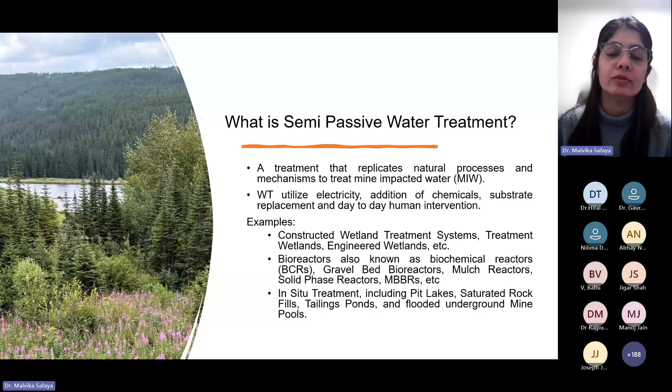Now bioreactors are kind of a replica of wetlands, so they are also known as constructed wetlands many times.

While selecting a semi-passive water treatment, there are some performance liabilities involved, some risks that need to be considered. The very first one is the maximum contaminant absorption capacity of the plants, because whatever inflow comes in daily will have different contaminant loadings every day. Then the second is the robustness of the water treatment technology under bad weather or extreme conditions.

Usually the biochemical reactors are all exposed wetland systems, so they are always exposed to the environment. Hence they can see extreme climatic conditions, extreme summers, extreme winters, also extreme rainfalls. So the robustness or sturdiness of the water treatment plant is very important.

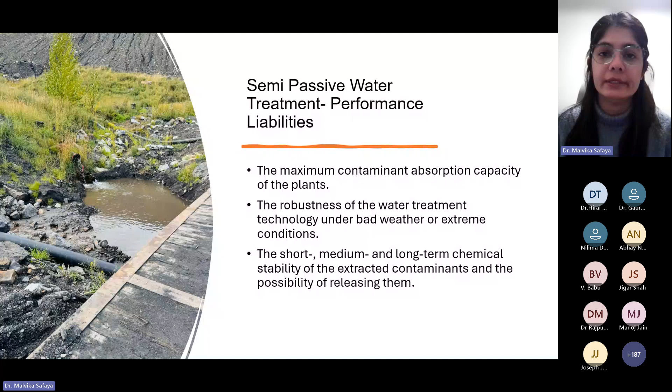The short, medium, and long-term chemical stability of the extracted contaminants and the possibility of releasing them is again a very important thing. The contaminants that we are trying to remove should become stable - if we are releasing them into the environment, they should become chemically stable.

BCRs can be constructed at remote mining sites with simpler equipment and materials than many other treatment options. They also require very little maintenance. They are gravity-driven systems and require very little energy. Unless a pump is being used, and then those pumps can also be powered by solar or wind energy. The materials for the BCR can often be obtained locally, which promotes reuse and decreases transportation needs.

Now all of this is well said and true, but in many cases and situations, sometimes it's really not as simple as it just looks like, and the pointers that we have started with.

Mine sites are mostly remotely located, so these are the factors that make the biochemical reactor a very suitable option for water treatment.

The Canadian coal mining industry is basically distributed into thermal and metallurgical. The one I work in is the metallurgical one, and we produce steel making coal.

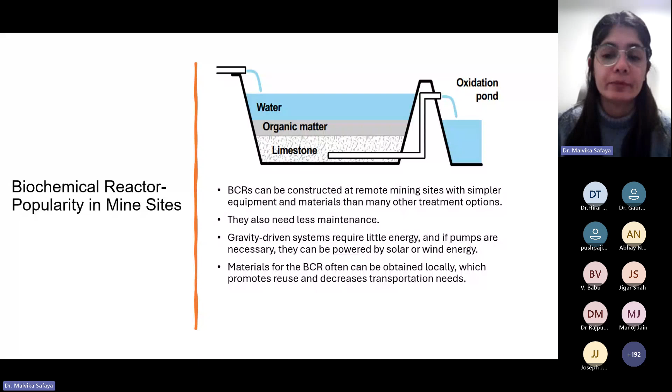The one I'm working at is the Brule mine. Conuma currently has around 4 mines: Wolverine, Willow, Brule, and Quintette, which was newly acquired. A very recently acquired one is the Peace River mine.

Out of all these mines, currently Brule is having the main biochemical reactors as a functional one for, I think, the past period since around 2015. Whatever gets started, like pilot scale or large scale, it gets started at Brule and then it gets applied at all the other mine sites.

Conuma Coal Resources Limited has one open pit coal mine site called the Brule mine, located in northeastern British Columbia. To meet the water parameters and comply with the Environmental Management Act permit 17679, a semi-passive water treatment, that is a biochemical reactor, was constructed in 2015 with an upgrade in 2017.

The treated effluent that we finally get released should meet the permit compliance and requirements, and then it gets discharged into Blind Creek, a small river tributary which joins the main Sukunka River, the main river body out there.

The 4 parameters of major concern for us when discharging this effluent are selenium, total suspended solids (TSS), nitrates, and total phosphorus.

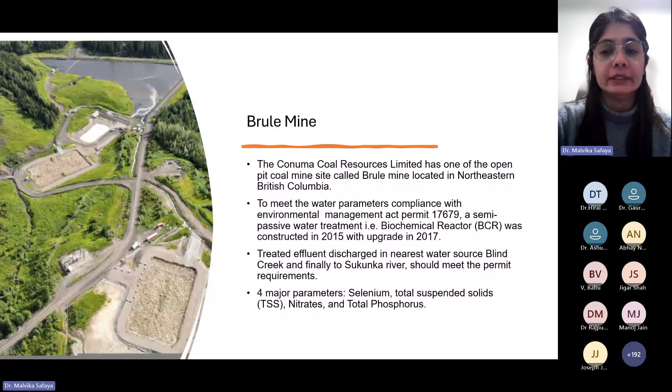The connection is such that the main sediment pond is the source of water to both BCR1 and BCR2. Once the water gets treated in BCR1 and BCR2, it goes to the aeration ponds, and from there this line goes to the MSP, the main sediment pond, and from there the water finally gets discharged into Blind Creek and then into the Sukunka River.

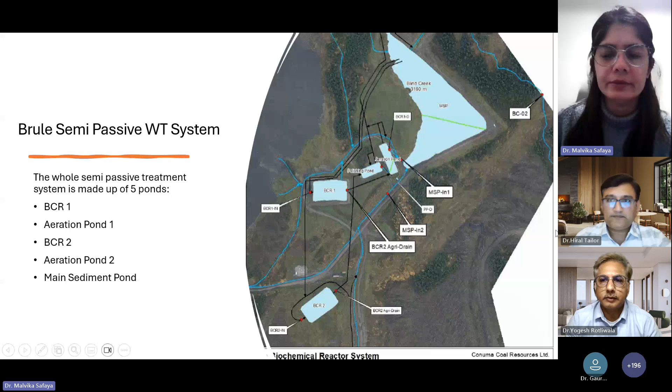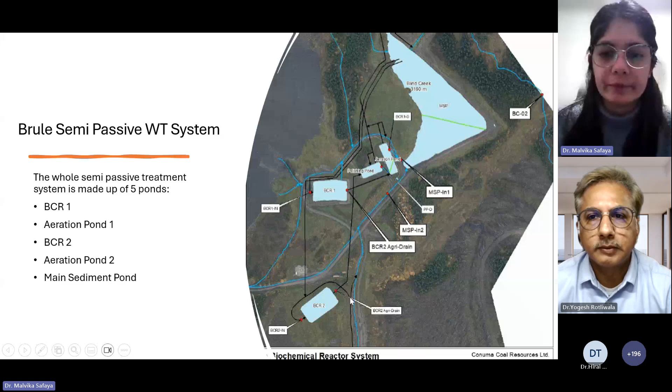Continuing forward, we have these two ponds and they are interconnected to the aeration pond, which finally goes to the main sediment pond. I believe these lines are not so synchronized because this whole system has undergone changes many times, so some of the images I have are very old and not properly updated. But the idea is I'll be explaining in the upcoming slides how this whole system is functioning.

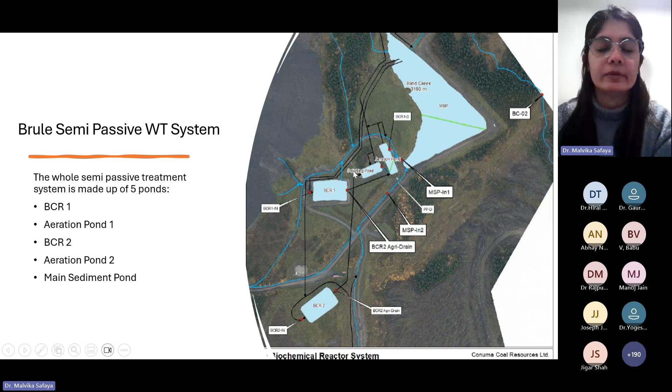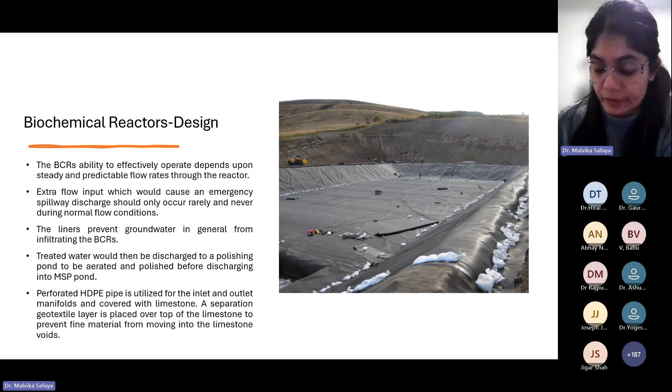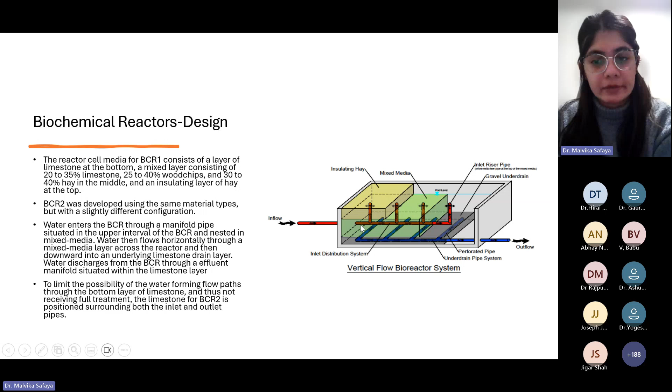A separation geotextile layer is placed on top of the limestone layer to prevent fine material from moving into the limestone voids. So in the previous slide, this particular limestone gravel layer also has a geotextile material on top of it, so that all the particulate solid material doesn't get trapped into this limestone layer.

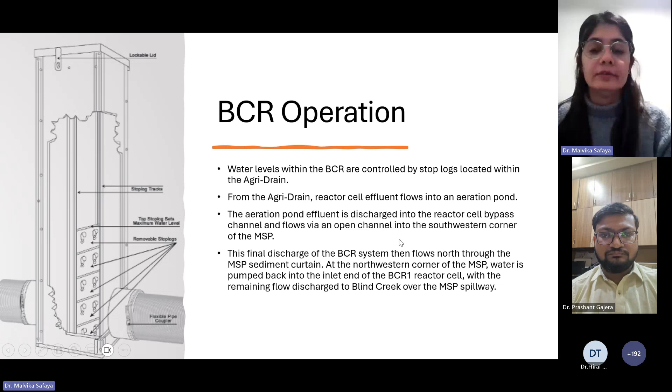This is something I'll explain further in the slides: after the BCR, there is the aeration pond and then the MSP pond, showing how water flows from this particular discharge site to the aeration pond and finally to the main sediment pond. I'll cover the last two lines more in other slides, but this particular slide was to show how exactly the agri drain works.

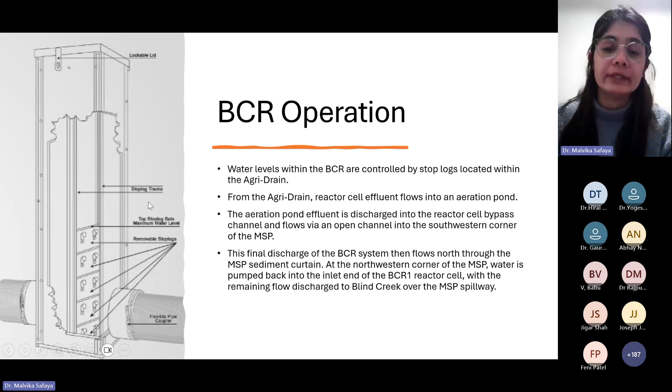Agri drain is very important in both BCR1 and BCR2. Only those two reactors have this agri drain. This regulates the water inside the BCR, and it's also the sampling point station, where we sample the water quality to confirm it's properly treated coming from the BCRs.

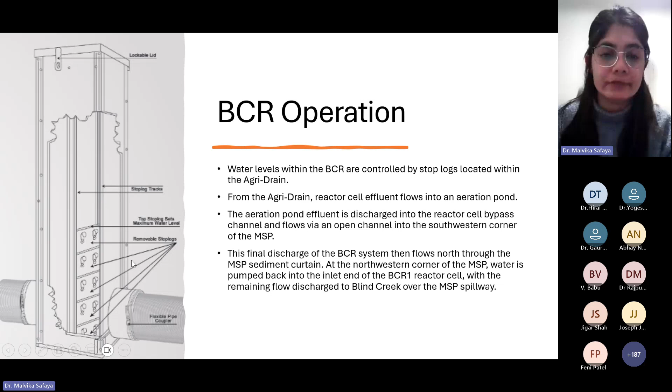The design parameters for any BCR to be effective: you have to have steady flow rates, you have to have pH levels maintained, and the loading rates. When we say loading rates, we mean the contaminant content in that particular water coming from the mine site. So total metal loading rate is a function of flow, and this affects the BCR size.

If the pH of the mine-impacted water is low, then you need an increased passive BCR size. Mine-impacted water, to be treated in the reactive part of the system, needs to remain in that part of the system for some time, which is also known as the retention time.

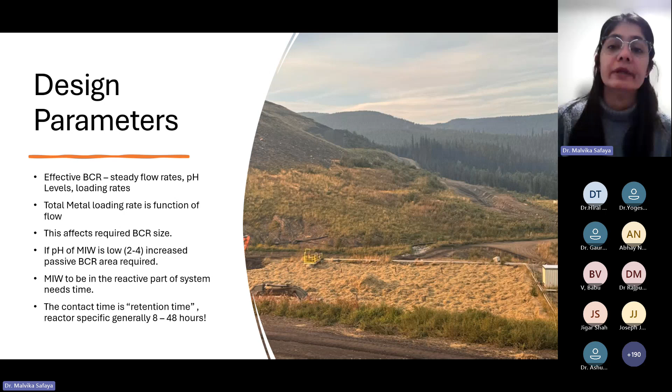This particular contact time can generally range between 8 to 48 hours in a BCR. But here in this particular biochemical reactor, we had the retention time as 12 hours.

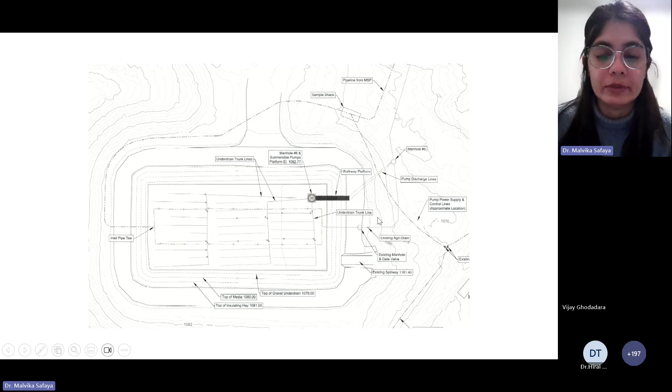So what happens is, in BCR2, when you remove the stop logs from the agri drain, the water level declines very sharply. But it doesn't happen the same way in BCR1. In BCR1, there's a semi-permeable membrane structure that restricts the flow. So even if we remove all the stop logs from the agri drain, there won't be a radical decline in the system. Water will get slowly released out, but it will not empty the pond immediately. Right, so that's the difference between these two ponds.

Now, the water levels in the reactor cells are used in conjunction with the flow rates to establish the reactor cell's hydraulic retention time. There are two main reasons for adjusting the water levels inside the biochemical reactor. The first is due to the flow increase or decrease, whatever is coming as inflow. The second reason is to adjust the ORP, oxidation reduction potential, to an optimal range for treatment performance. The effectiveness of the BCR will be monitored through lab data and field parameters.

We are taking the water samples daily. We are going to measure how the treatment is going on. But if you really want to see an immediate response or analysis of the biochemical reactor, whether it's functioning properly, it's the oxidation reduction potential value that gives you an almost accurate estimate of how the reactors are performing.

So if the ORP is increased to above minus 200 millivolts, an assessment will be made on whether the flow rate should be decreased to allow the system to regenerate. Going beyond minus 200 millivolts is not desirable for a BCR to be functioning effectively.

Now let us see the BCR treatment further. The breakdown of the organic media over time promotes reducing conditions. ORP should be less than -100. Ideally, in our case, it should be between -100 to -150 to -200 for us to consider that the BCR is working effectively.

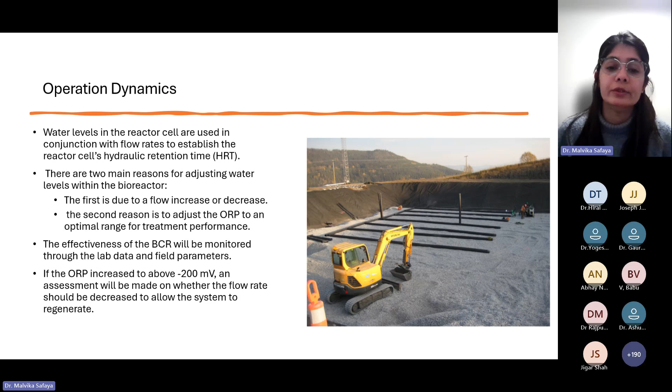The reason is probably that AP1 and BCR1 were already constructed, and BCR2 and AP2 were formed later on, using the available space they had, since they needed gravity flow. On the mountain, the space available for aeration pond 2 was limited. The storage capacity for the main sediment pond is around 102,000 meter cube, the largest capacity out there.

Now I can explain how the aeration ponds and the main sediment pond work. The aeration pond serves two primary purposes: oxygen is diffused in the pond to re-entrain oxygen in the anaerobic effluent from the reactor cell, and fine suspended solids in the reactor cell effluent, including elemental selenium and selenium sulfide compounds, get settled before final discharge from the system. Whatever comes through the effluent discharge from the BCR, we still allow it to settle further in the aeration pond.

The aeration pond pump provides a continuous steady flow of water that is not meant for discharge, and is recycled back to the aeration pond to ensure the water level remains at a steady state. There can always be fluctuation in the BCRs, but there is always a recycle line in the aeration pond to keep water levels steady, and the aerator runs continuously to maintain oxygen levels in the pond. Discharge flows are regulated based on the flows through the BCRs.

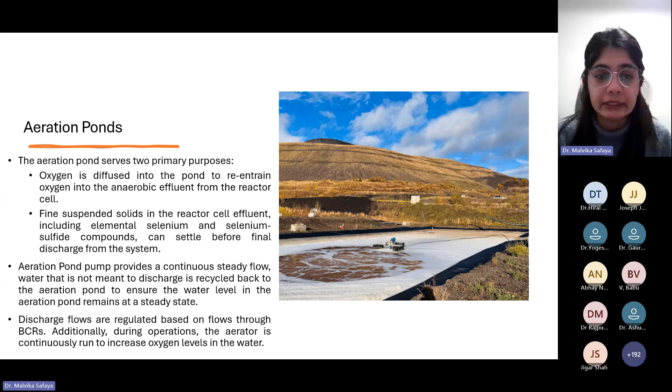So there is a partition being made into the main sediment pond. These partitions act in such a way that one part gives influent to the BCR, while the other part takes all the effluent from the aeration ponds and allows the water to fully settle before it gets released into the Blind Creek. So major components of the main sediment pond include the influent and effluent gravity discharge channels, and also 2 effluent pumps and 1 influent pump.

These parameters are of highest concern because we have to ensure that the effluent being discharged meets permit and compliance requirements. The very first are TSS, nitrate, total phosphorus, total selenium, dissolved oxygen, ORP, total organic carbon, and biochemical oxygen demand. The collection and interpretation of water quantity and quality at various sites throughout the water treatment system are critical in monitoring system performance.

For all these parameters, we have to ensure that when the water finally reaches the Blind Creek, it matches these levels - we cannot exceed them. These limits are given by the government, and if we exceed them, we have to inform the environmental agency that the water has flowed to the creek, and that it has exceeded, for example, total selenium at 10 micrograms per liter becoming 12. We have to inform them that we exceeded it that day. It's not that we have to monitor it every single day, but in case the compliance is not being met, we have to inform the government as well.

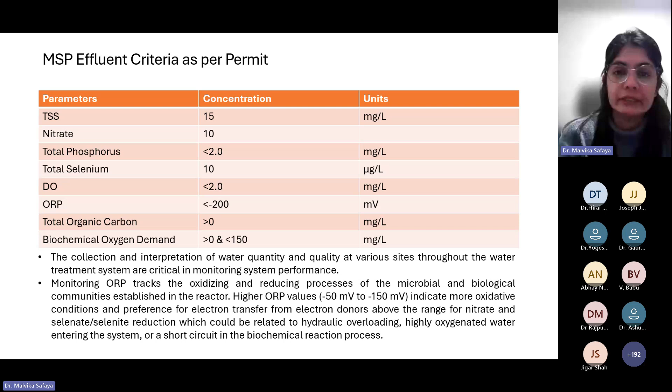Monitoring the ORP tracks the oxidizing and reducing processes of the microbial and biological communities established in the reactor. Higher ORP values indicate more oxidative conditions and preference for electron transfer from electron donors above the range for nitrate and selenite reduction, which could be related to hydraulic overloading, highly oxygenated water entering the system, or short circuiting in the biochemical reaction process. Usually when the ORPs start changing, that's the very first indication that something is not right happening in the system.

As I said earlier, when the water finally gets discharged from the BCR, the primary constituents of concern at the Brule mine are nitrate, selenium, and phosphorus - those three are the major ones. These parameters show the mine-related signatures in the mine discharges and at the compliance monitoring site, BC01A, in the Blind Creek. BC01A is the very major point that finally decides what water we are releasing into the main river.

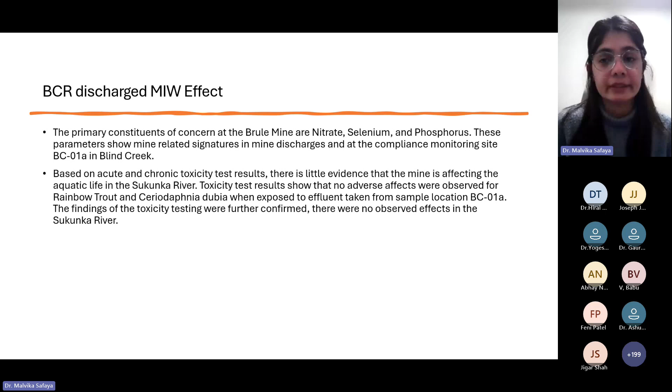Now let us see the drawbacks of the BCR system. A number of challenges have been encountered during the implementation phases of the BCR system. The very first of these relates to maintenance of a constant influent flow into the BCR, which is very crucial for the operation of the BCR.

The inflow to the BCR comes from the main sediment pond, which gets the dump of all the water from the mine site. So it can always change, the loading will be different, the contaminant level will be different. Ensuring a constant influent flow, the MSP does provide a constant flow to the BCR, but it is still a challenge to predict what the contaminant loading will be every day.

Moreover, inflow concentrations of major parameters like selenium and nitrate can vary significantly, and this can also impact removal success. In addition, sediment buildup can compromise the operation of the system. Proper sediment removal prior to the water entering the BCR will mitigate this issue. That's why we ensure the sediments are removed from the inflow, whatever feed enters the BCR, because more sediments will harm the mixed media, which is not very good.

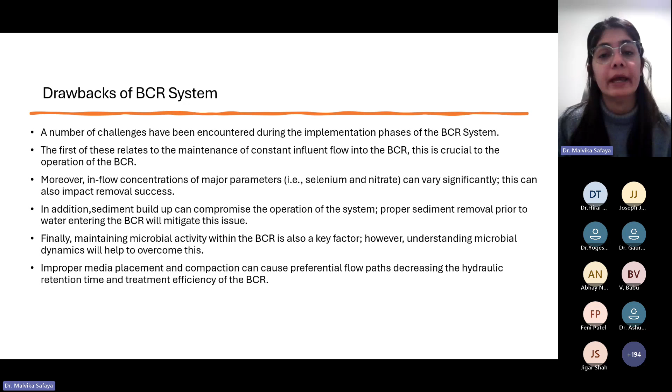Factors important for BCR system adequacy: sequencing and flow control are crucial to the proper functioning of the BCR system. Sediment curtains help reduce the sediment load to the aerator, and raised edges help reduce surface water runoff entering the BCR system.

So it was also done that the BCRs have to have raised boundaries, because when there is rainfall, all the regular water on the ground can enter into the system and disturb it. To ensure that doesn't happen, they have raised the BCR boundaries as well, to ensure that the system is not disturbed.

So though I can say BCRs are kind of open reactors, it becomes a very tough task to ensure that they are not impacted by the surrounding areas. That's the major problem BCRs face: they are open reactors exposed to the climate, the weather, and the surrounding areas.

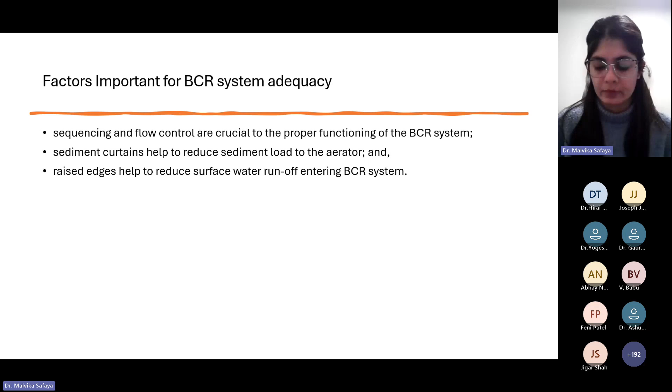There is also all the wildlife that can roam around. We have to ensure that the wildlife, we have seen birds come around, there have been deer sightings, bears, and everything. They drink the water as well. So they had to increase the depth and level so that surrounding factors don't impact it. That's a tough task, controlling the BCRs.

Now, why are they being decommissioned? All over North America, the BCRs are being decommissioned now. They are on the verge of getting decommissioned even at our site. The reason being the maintenance cost. Earlier it was defined that the maintenance was not that much.

But what happens is when sediments are getting built up, in a year you have to check twice that there is no sediment formation and that the hay media is proper. Such a huge biochemical reactor requires a lot of hay and media to be in the right proportions, so there is a lot of labor being utilized. It's not as cost effective as it was understood before.

But what has also happened is there have been stringent environmental regulations, so if you have to ensure the BCR functions properly every day, it becomes a costly maintenance problem. There's also the carbon footprint, because you are disposing all that hay media and sediments, so you are increasing the carbon footprint.

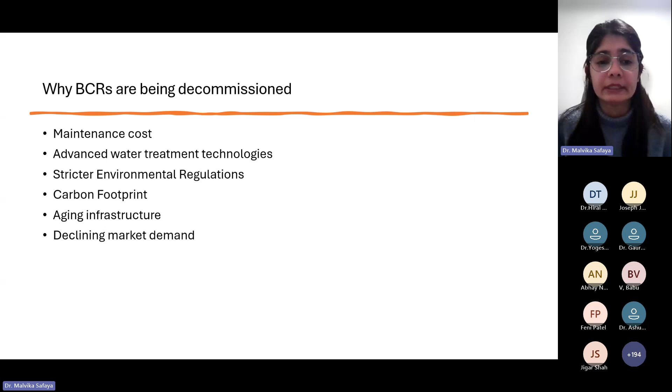Aging infrastructure: many of the BCRs in North America were built about 20 years back, so now is the time they are going for new modern water treatment technologies. So, declining market demand.

Now this particular one, the moving bed biofilm reactor. So what has happened at our mine site is they have developed a pilot scale plant and have been running it for many months to see if this works, and they will be decommissioning the BCRs fully. They have also started construction of a full scale plant of this moving bed biofilm reactor.

Now, it's a pilot design which treats 20 gallons per minute and uses microorganisms to convert the soluble forms of selenium, primarily selenate and selenite, to elemental selenium, which is insoluble. So it is doing the same thing as your BCRs.

Now both of these tanks have a plastic treatment material, which is buoyant plastic media. The media in BCR was the hay media, but here it's small plastic circular media that gives the surface area for the microorganisms to react. So this plastic media gives that surface area for the treatment. When using such small plastic media, it increases the surface area for treatment, which is a very good substitution to the hay media we see in the biochemical reactors.

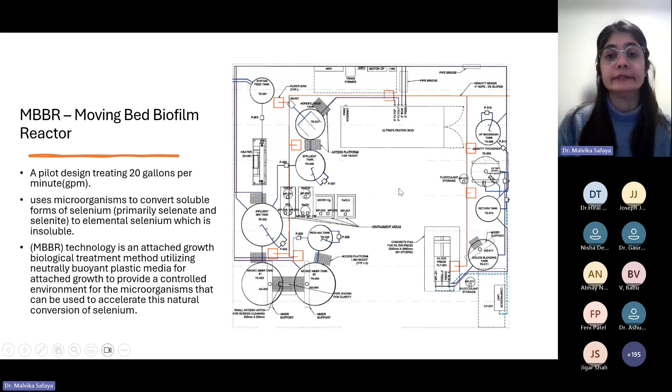And it's efficient. When efficiency matters to the organization, MBBR is the way forward, because at the pilot scale, it has had more efficiency in removing selenium. BCR was found to be only 40 to 60%, whereas an 80% reduction has been found in MBBR.

Now, the current challenge is that you need continuous monitoring, so you need expert people to monitor the system continuously. We have also found that the plastic media was getting clogged into the discharge lines, which usually shouldn't happen since it's floating, but it was sometimes getting stuck in the outlet line. Our maintenance team has put a mesh on the outlet so the plastic media doesn't flow out with the outlet flow. And the influent water needs a temperature of 20 to 30 degrees Celsius.

The temperature below 10 degrees Celsius will not kill the bacteria, but it will significantly slow their growth, synthesis, and biochemical activity, therefore negatively impacting the treatment rate of selenium and nitrate nitrogen.

Currently, a shell and tube type heat exchanger is being used in this pilot plant, whereas for the fully constructed plant, they have gone for a plate and frame type of heat exchanger. Because when you go for larger, huge systems, the shell and tube could require more cleaning and maintenance compared to a plate and frame. That has been the difference they have made in the newer big plant.

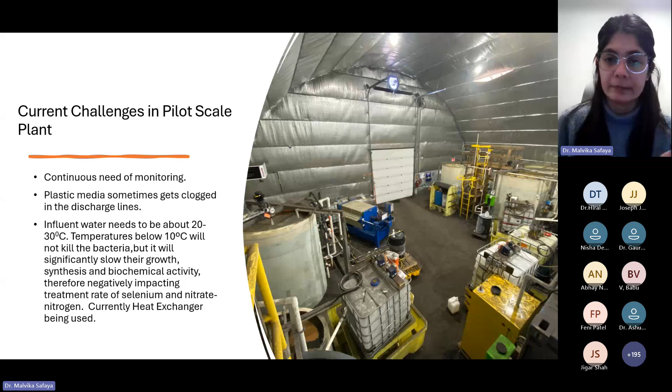When we say maintaining the temperature, see what I mean - the temperatures at this site usually go to -52. So when the outside temperature is -52, even this particular enclosure has some limitations in spite of all the insulation. The temperature drops here very quickly.

Now, finally, the overview of the mine wastewater treatment. With the advent of mining industry, the water bodies of the surrounding areas have shown increased concentration of metal elements, and heavy metal water pollution has become a very severe problem in a country like Canada, one of the world's largest mining industries. There are a lot of mining industries out here - not only coal, they have uranium, gold and diamond mining sites as well, copper mine sites as well.

So water treatment has become a very dire need for these places. Canadian mining activities contribute significantly to heavy metal pollution. For example, in British Columbia, it is estimated that there are 1 million tons of waste rock and 950,000 tons of tailings produced per day, for a total of 650 million tons annually.

There are many active coal mining sites in British Columbia which generate large volumes of wastewater containing heavy metals such as selenium, nitrate, TSS, and phosphorus from mine site blast and other mining operations. Usually when we are blasting these sites, that's the main reason why most of these metals come around.

The Brule mine is authorized to discharge effluent from the main sediment pond under the regulatory reporting requirements outlined in the effluent permit. That's the permit issued by the British Columbia Ministry of Environment and Climate Change Strategy. With stringent rising environmental concerns, the mine is shifting towards newer technology to treat water.

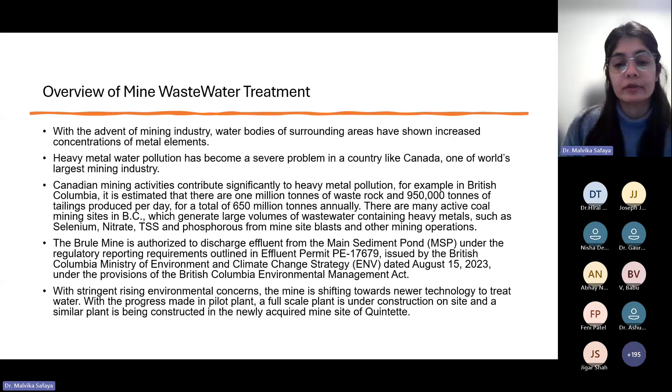With the progress being made in the pilot plant, a full-scale plant is under construction on site, and a similar plant is also being constructed in the newly acquired mine site of Quintette. And as I said earlier, they have also acquired a new site at Peace River. They are going to construct a similar plant there as well.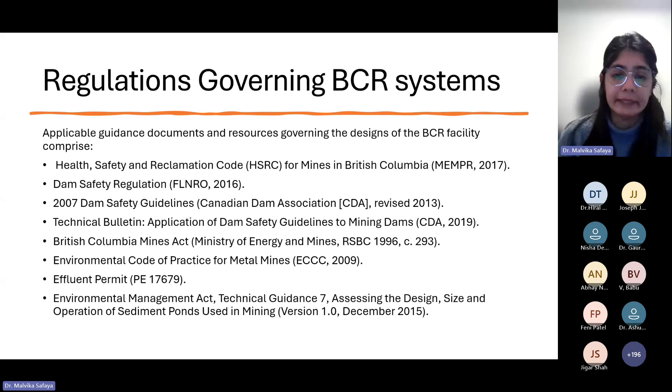And these are my references.

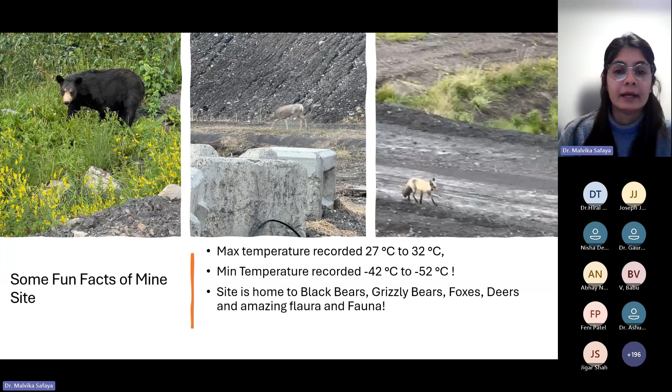Yes, thank you, ma'am. Thank you very much, madam. Yes, my question, ma'am. I only have one question.

During those -30 or -50 degrees centigrade, does this water body freeze up? How do you perform the daily practices, I mean for aeration or anything like that? It's a very tough task.

That's a very good question also, because that's the main question which kind of makes us realize why these treatments are becoming obsolete now.

So the very first thing, it's not getting fully frozen. The snow kind of stays on the top layer, which you could see in that particular image. It stays on the top layer and kind of makes an insulated barrier. So there is hay, then there is a mixed media. The water is somewhere in the mixed media. So again, on top of the hay, you have the snow. Snow is getting restricted on that hay, and it kind of creates an insulation sheet.

There have been reports of many bioreactors in the North American regions, wherever there is this problem of snow, being constructed underground to completely avoid this whole factor of frozen areas. So the lines which are the influent and discharge line are just below the ground, constructed below the frost level area, so even that is not getting frozen.